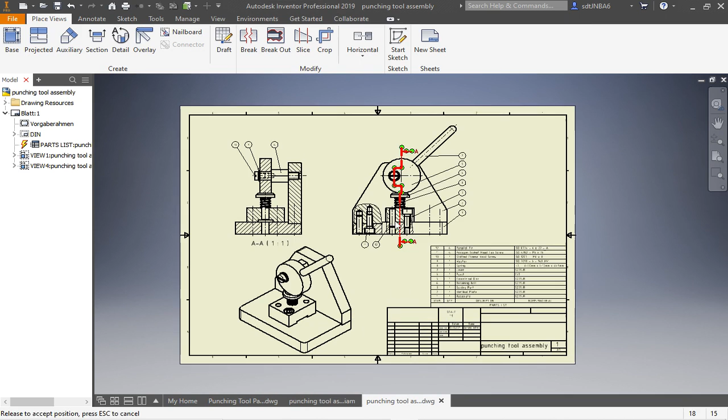I got the punching tool assembly. In this project we're going to create all the parts and build them together into the assembly. Later on we're going to make a drawing of the assembly, and hopefully the drawing of the single parts as well.

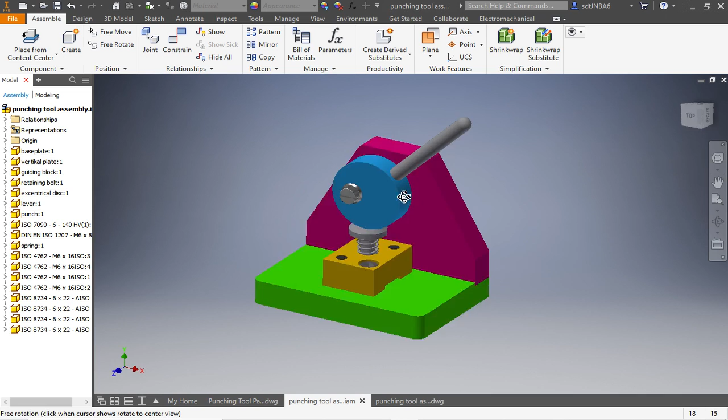So at first I want to concentrate on the rotational parts: the lever, the punch, and here you have the retaining bolt. Let's get started with the lever.

We create a new file. Select sketch, and now we have to select a plane.

Since it is a rotational part, at first we need a line. Pick up a line, draw a line that is horizontal. Go to the constraints, make this line the same point as the center point, click the line to make it a center line, and then we have the center line.

We start first with the thread of the lever, and I want to have the thread on the left side of the center point, because when I assemble the lever in the eccentric disc, this is the plane where the lever hits the eccentric disc.

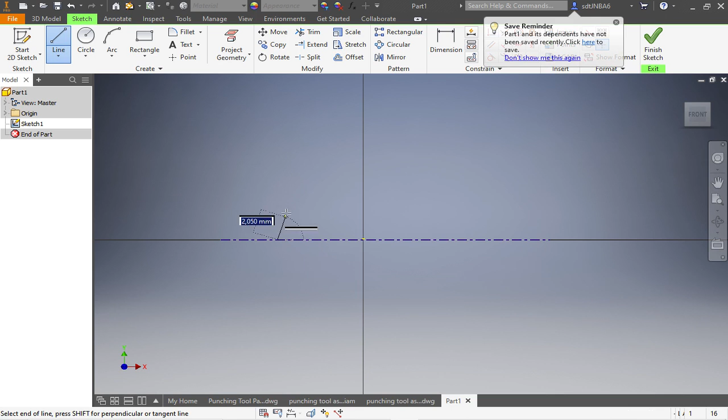So let's start with the thread. It looks like this, has a diameter of M6, so we need 6 millimeters here. It has a length of 8 millimeters. Now we have to make sure the end of the thread hits the center point.

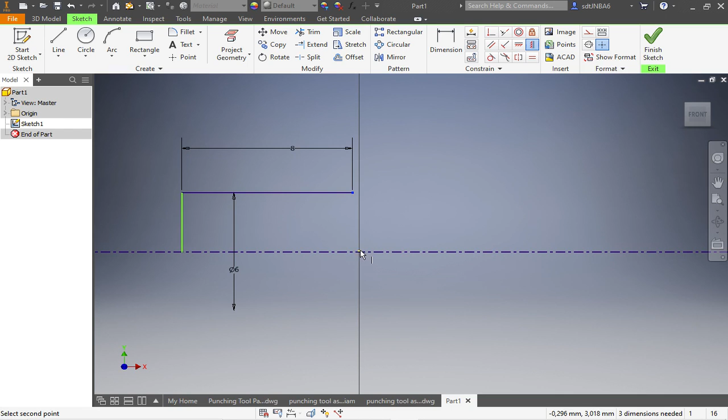We can arrange that by using a vertical constraint and making this dot vertical.

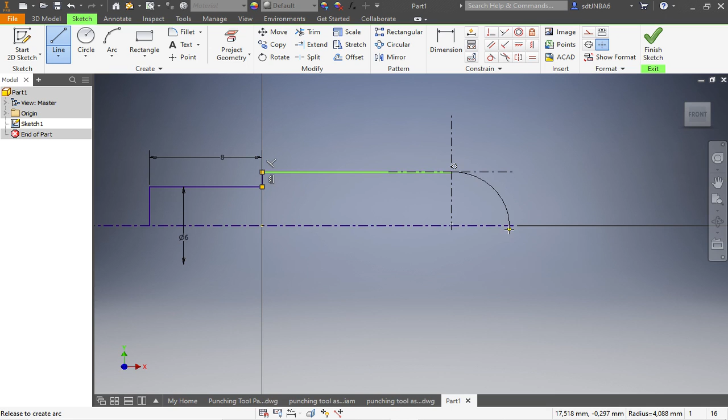Now we're going to make the rest of the lever. To create the arc at the end, left click your mouse, hold the button, don't let go, pull down, and place the end of your arc on your center line. Let go, then grab the center point of your arc and put it on the center line.

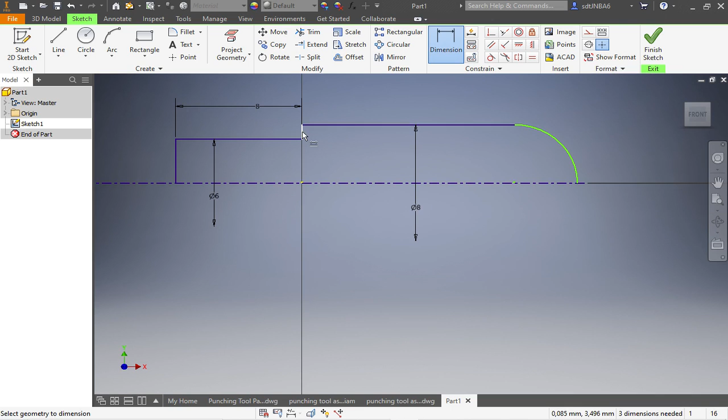Now give it a diameter of 8 millimeters and a final length of 60 millimeters from here to there. Normally this is the way you design such a part, and it's different from the technical drawing - this is how it looks for manufacturing versus how it looks when you design it. So we're happy with that.

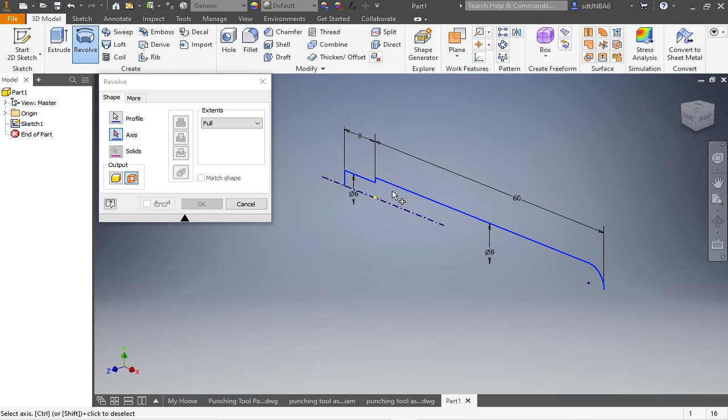Finish the sketch, revolve. In this case the program doesn't find the profile automatically. Even if we hit the profile and select it here, it will not rotate. If it's this kind of red, we know the body is hollow, not full.

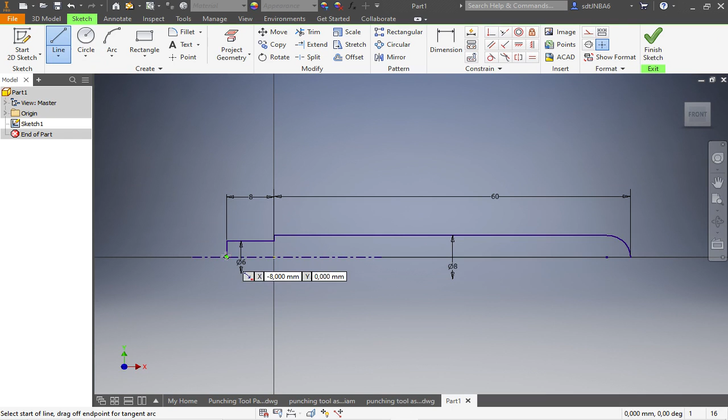In this case, go back to your sketch, edit it, and close the contour completely with a separate line. This happens every once in a while in Inventor - like in SolidWorks, you always have to close the sketch.

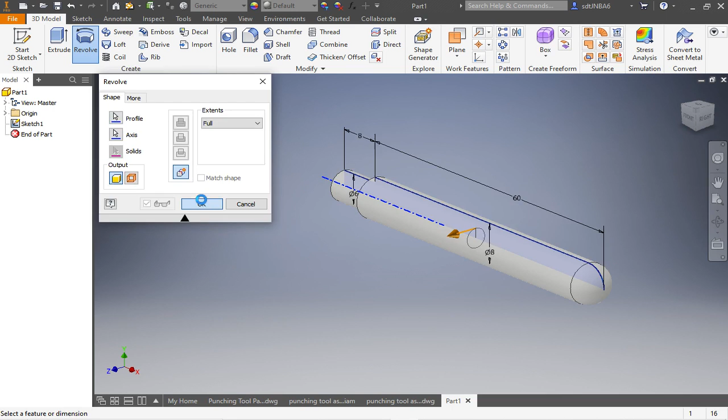Now everything's fine, the profile is found automatically, and the axis is chosen automatically. We say OK, and we're done.

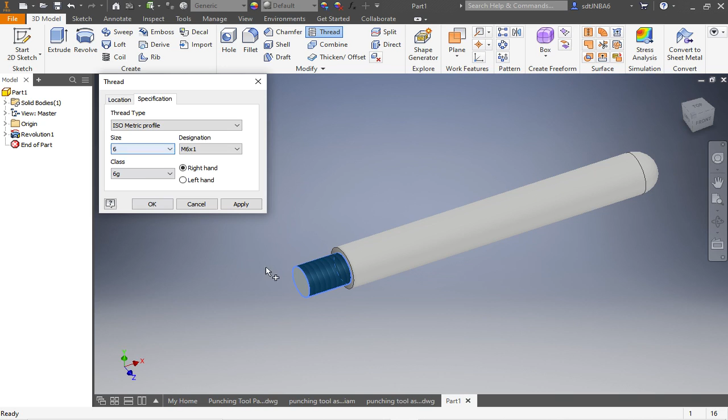Next thing is we create a thread: choose the surface we want the thread on, full length from beginning to end. For specification we choose an ISO metric profile, and we already have the right size - it's M6 because of the diameter - and we're fine.

Last thing we need to do is bring on a chamfer of 1 millimeter on the edge.

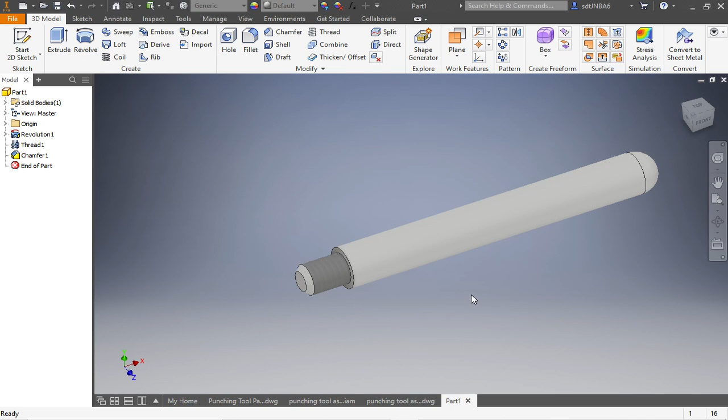We save it. So you have to create a new folder, punching tool. So the next part will be the punch.

Now you can make a screenshot of this one and try on your own. I will shortly show you how I made it.

So let's talk about the punch. This is my sketch of the punch. Start a sketch, select the right plane, the XY plane - you can see it right here. Create a center line with this tool, place the center line in the center, and start the sketch here at the center point.

This time it doesn't matter if you take a 25 and a 5 here or the 30 and 25, it just doesn't matter. You can insert the chamfer if it's not 45 degrees. In case it's 45 degrees, as in our case, I recommend making it with the chamfer tool.

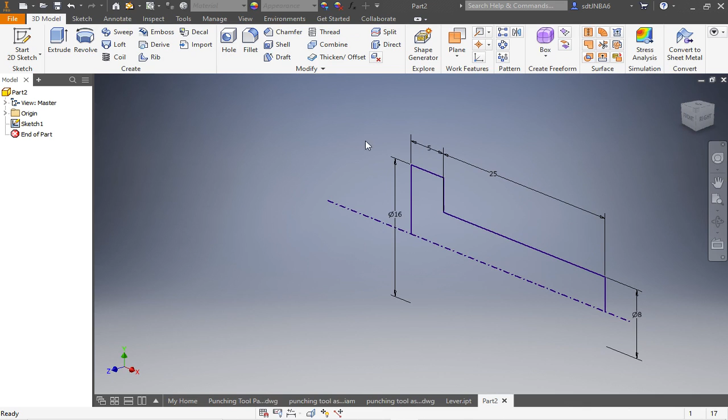Exit. Now you can see this time we don't have to close the sketch fully, the contour - the program finds the rotation. Add the chamfer, it's 2 millimeters, 45 degrees, that's good. And we're done with the punch.

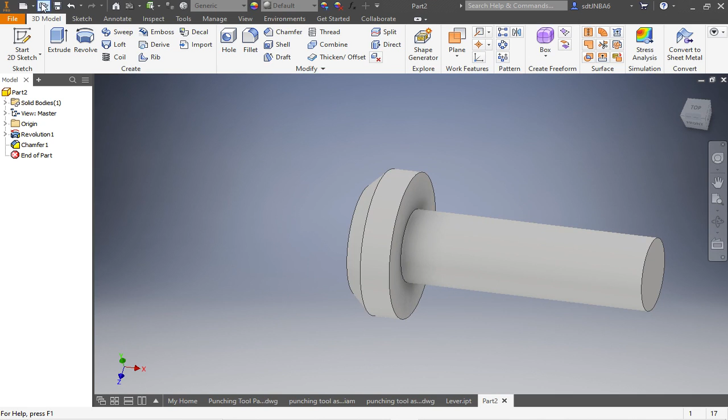Now let's take care of the retaining bolt. The retaining bolt has 3 parts: a thread, a round part with a tapped hole, and this hexagon part in the middle.

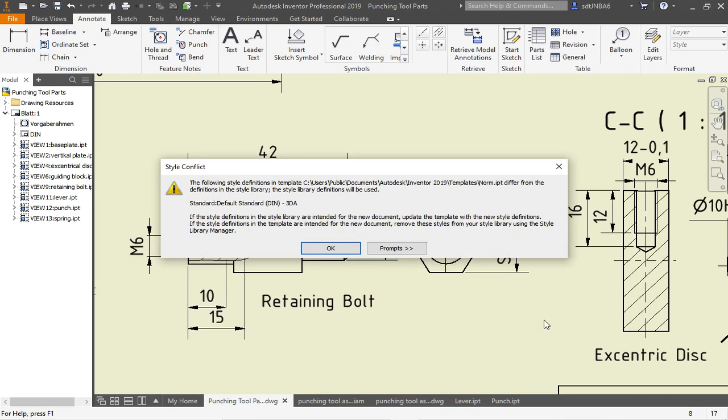Go on File, go on New, create a standard part, start a sketch on the YX plane, create the center line, place the center line in the center, switch the center line to a center line.

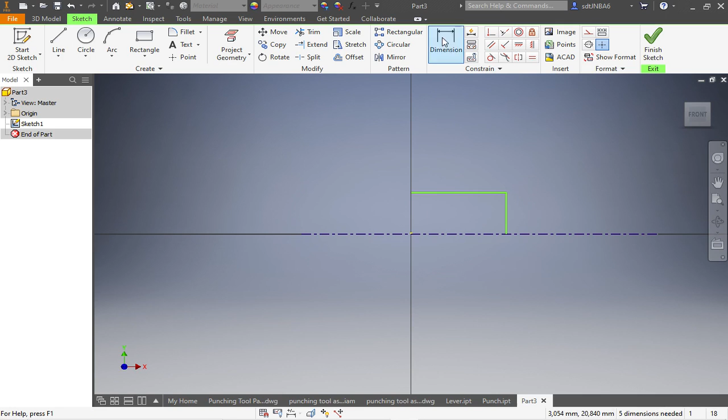So let's start with the sketch. For me, I want to have the thread on the right side this time. And let's bring in the dimension of the thread. It's an M8, so we have a diameter of 8. We have a length of 12 millimeters.

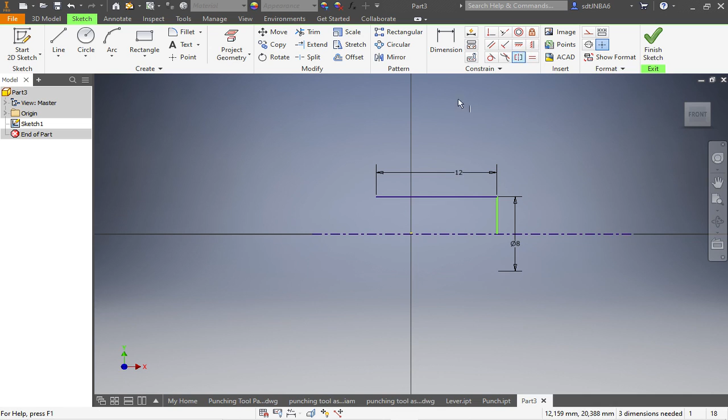Now let's make sure that this point is vertical to the center point. Then we have to create the part of the hexagon, and the left part as well.

Now for the outside diameter, we take something that's definitely bigger than the 15 millimeters of the SW15 for our tool. So let's say 20 millimeters will do the job. It doesn't matter, you can choose 25 if you want to - you'll see later why.

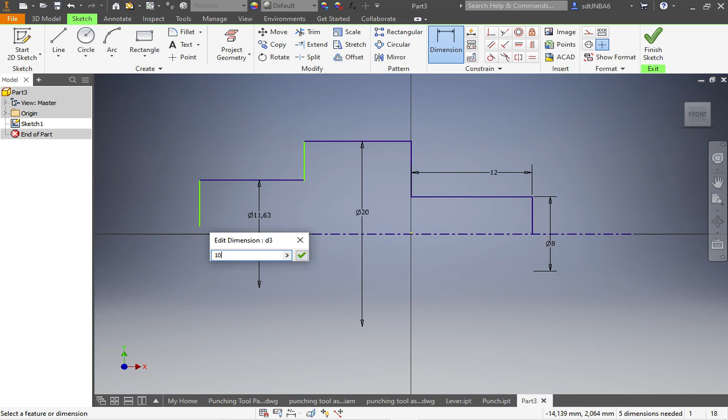This diameter is 10 millimeters. Now we bring in the lengths. We have 12 millimeters here as well. And this will be 18.

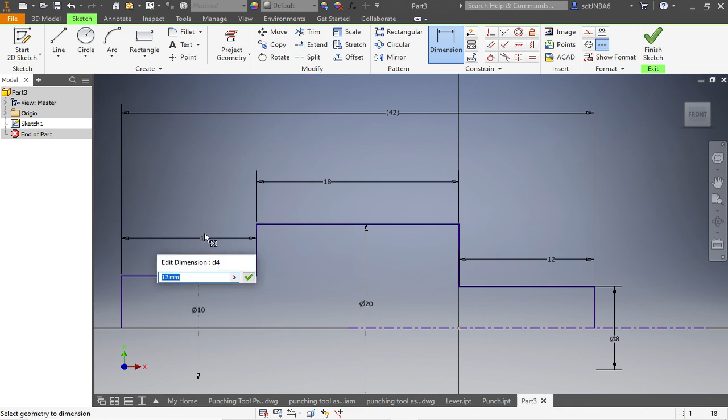So we will check if we calculated the right way. You can see it's 42. So if you have it in brackets, then it says this dimension is driven by all the other dimensions. Okay, so this is the basic sketch.

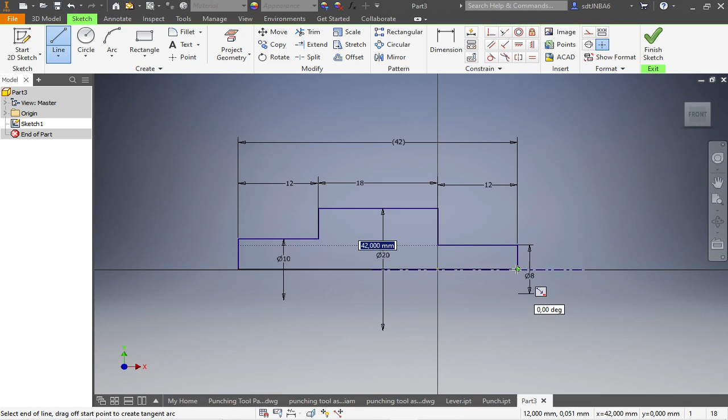Finish, exit. Let's see if we can revolve it. Doesn't work, so we have to close the sketch. Go on the sketch, right click, edit the sketch, and close the sketch like this. Revolve it. There we go.

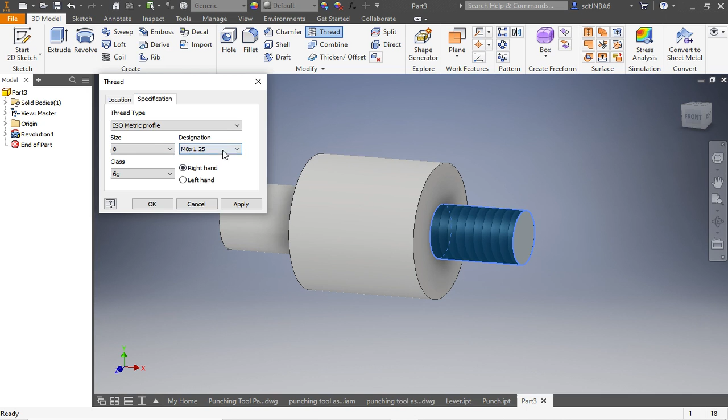Now let's create the thread on this surface. It's an M8, we have to choose ISO Metric profile, 8, that's right, M8, like this. Make a chamfer, 1 millimeter, that's good enough.

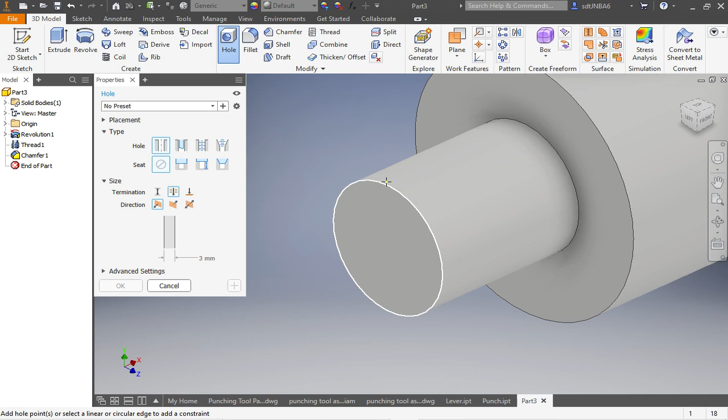On this side, we're going to enter the hole. This time I don't want to make a sketch - I want to make the hole in the center of this part. So simply click here on the surface, and now pull the center line of your thread into the middle of this circle.

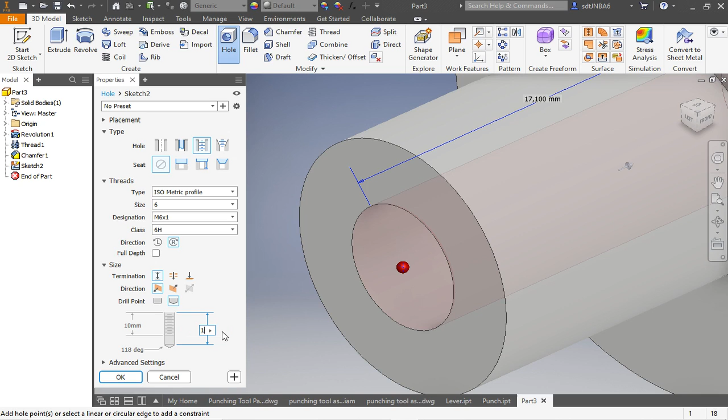It's an M6, so go on Tab Tool, choose ISO Metric profile, choose the right size, M6. We have the termination on distance, and we have here a 10 millimeter, and for the hole we have 15 millimeters. Say OK.

And that's fine. Start a sketch, and this time we take this surface. We're going to project the outer diameter, and project the XZ plane and the XY plane.

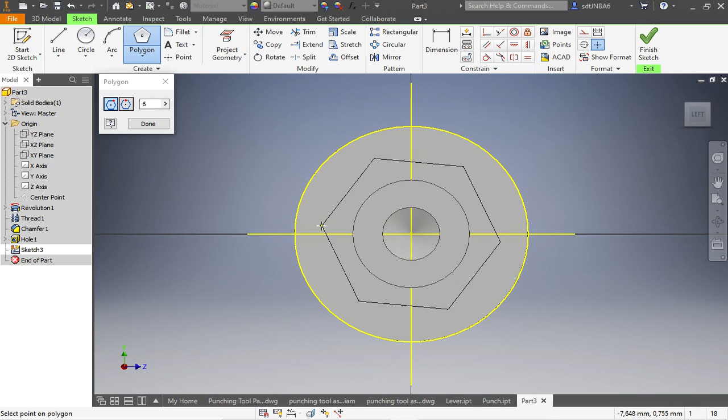Now go on rectangle, and here you go on polygon. Now we have a hexagon, 6, place it in the center. Bring it out like this, so make sure that a corner of the hexagon snaps to the horizontal line. Now go on dimension, give it 15 millimeters.

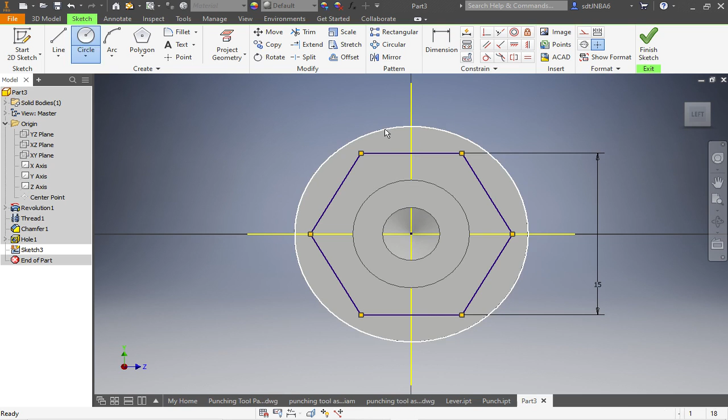That's good. All we need to do is create a circle that fits on the outer circle. Now go on finish, extrude to make a cut. We choose the profile and extend it through all. Say OK, and now we are done.